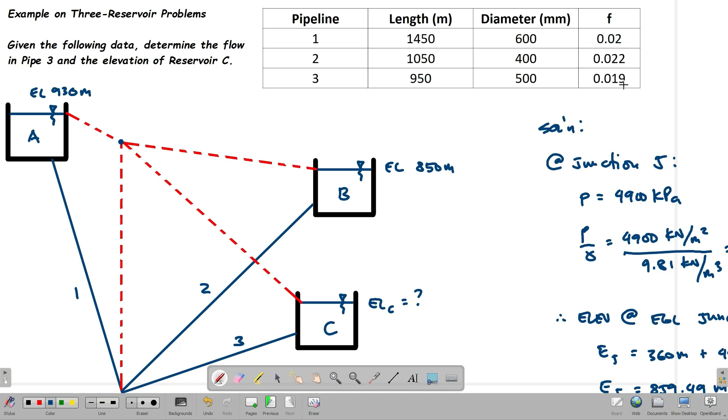So pag F yung binigay na factor or coefficient, ang gagamitin natin dyan automatic is si Darcy-Weisbach na equation. Okay, so ito yung figure natin. Meron tayong tatlong reservoir, tapos given yung elevation ng A tsaka B, which is 930 meters and 850 meters. Tapos meron ding junction dito, ang elevation niya given is 360 meters. Tapos merong pressure gauge at this particular junction J, ang pressure reading natin is 4,900 kilopascals.

And then dinrawing na din natin dito yung energy grade line, yung EGL, on the assumption that the flow from 930 meters, magpo-flow siya dito sa 850, tapos yun, assuming lang na dito din, magpo-flow din. Pero double check natin yan mamaya, kung totoo ba talaga na yung distribution natin is galing sa A, papunta dun sa B, tsaka sa C.

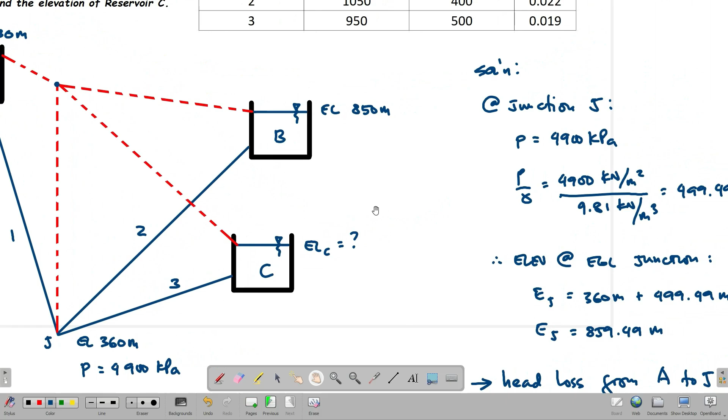Double check natin, okay? So unang makuha natin dito is height ng water dito sa junction natin, if lalagyan natin ng piezometer dyan, aangat yung tubig dyan. Tapos yung height kung saan aangat yung tubig, yan yung equivalent dito sa pressure head natin. So similarly, para lahat ng units natin is naka-linear meter, kailangan din natin i-convert yung Pascal, o yung kilopascal, i-convert natin into linear na unit or meter, kailangan na siyang gawing pressure head. So yung pag-convert ng Pascal or pressure to pressure head, divide mo lang siya sa unit weight.

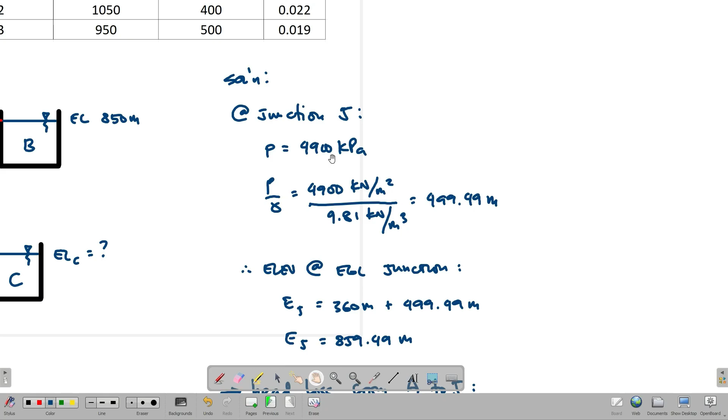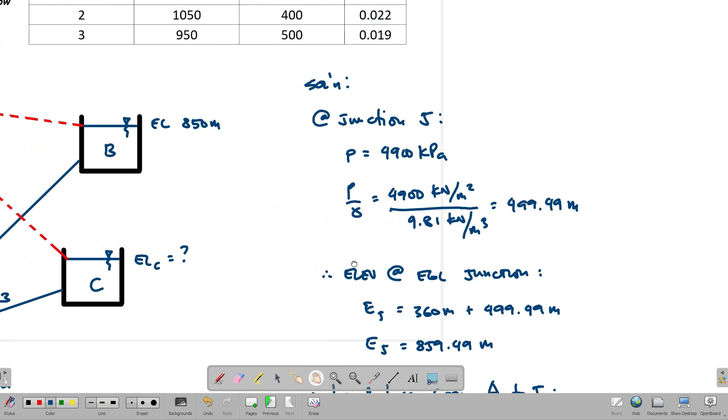So magiging ito na yung value niya, 499.49 meters, yun yung equivalent na pressure head sa pressure na 4900 kilopascal. I-confirm lang natin sa calculator natin, that's 4,900 divided by 9.81, that's 499.49 meters. So pag lalagyan natin ng piezometer yung part na to, mag-insert tayo ng piezometer dyan.

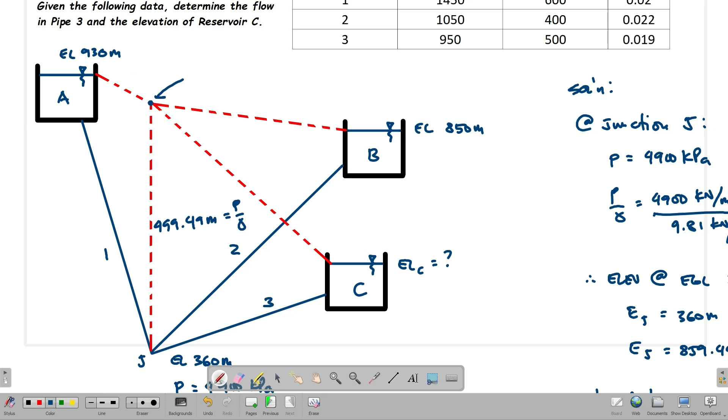Yung height kung saan aangat yung water, water level. So yung water level is just equivalent to plus 499, yung height na yan is 499.49 meters. So ito yung pressure head, okay, pressure over unit weight. So ayusin lang natin yung P, yan, pressure over unit weight. So therefore yung height dito is equivalent lang dun sa additional na 499.49 dun sa 360 na elevation niya.

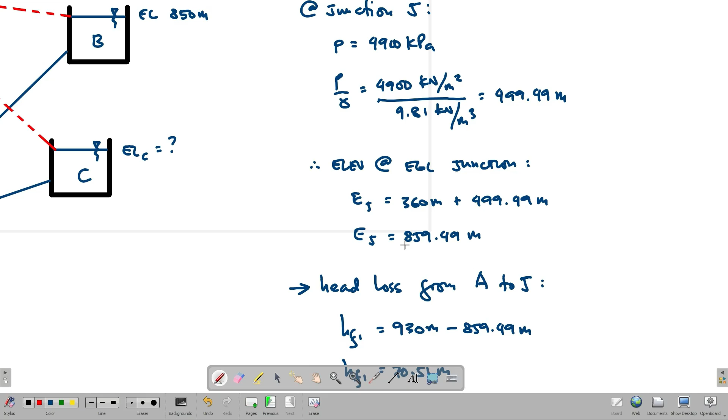So sinulat na din natin dito, that's 360 plus 499.49 equals 859.49. I-confirm lang natin sa calculator ulit, 360 plus 499.49, that's 859.49 meters. So confirm naman, gawin natin dito, this is confirm, this is confirm. Tapos dito, ito na yan, yung elevation na yan, that's 859.49 meters, that's the energy na ngayon dito sa point na to, sa junction, parallel dun sa junction point natin.

So again, yung blue na lines, ito yung actual talaga na pipelines, tapos yung broken red na line, that's the line representing the energy grade line, okay? So dito meron kang energy which is just equivalent to 930, kasi maging 0 yung pressure mo dito, 0 din velocity. Ito naman equivalent lang sa 850, so ang ibig sabihin dito, ang energy dito is just equivalent to pressure over unit weight plus yung equation pa rin natin ng energy, plus Z. So 0 yung pressure dito kasi open sa atmosphere, 0 din yung V kasi negligible yung change natin ng water level, so Z na lang yung matitirang component ng elevation. Therefore, yung energy natin at this particular level is equivalent na sa 850 meters.

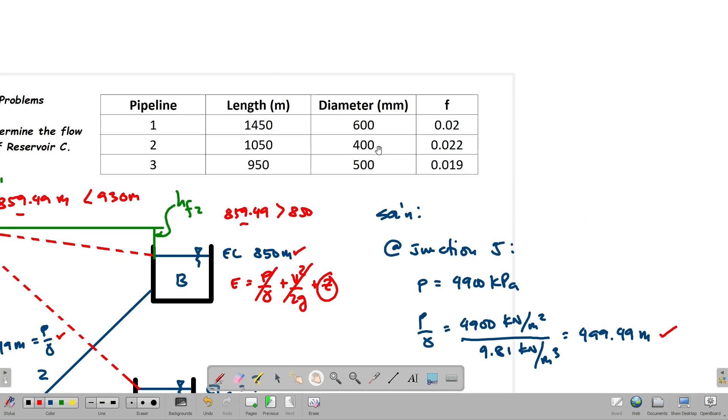Tapos, substitute natin yung mga details ng pipe 2. So 1050, 400, 0.022 yung F, no? So we have 1050, 1050, 400, tapos 0.022.

Tapos makukuha na natin dito si Q2. So si Q2, that's 9.49 times 0.4 raised to the power 5. Divide natin si 0.0826 times 0.022 times 1050. Tapos square root ng answer. Yan, 0.2256, or ginawa na natin dalawang decimal lang, no?

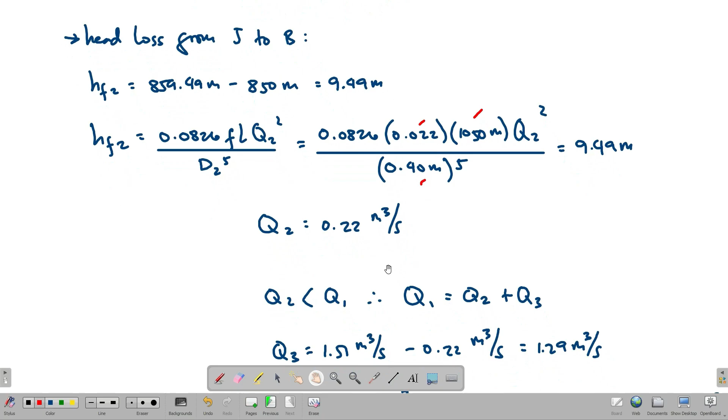0.22. Ngayon, since mapansin natin, less than, no? Q2 is less than Q1. Tapos tatlong pipes lang naman to, no? So therefore, talagang madidivide si Q1 into Q2 and Q3. Kasi nga less than naman, no? Less than si Q2 compared sa Q1.

Kapag kunwari mas malaki si Q2 compared sa Q1, therefore may iba yung equation niya, no? So kung mas malaki si Q2, therefore mag-a-add up si Q1 tsaka si Q3 papunta sa Q2 kung mas malaki, no? Pero since mas maliit siya, no? So less than. So therefore ito yung mangyayari, no? Q1 is equivalent to Q2 plus Q3 kasi nga less than, no? Ibig sabihin may component si Q2 from Q1, which is yung other component is si Q3.

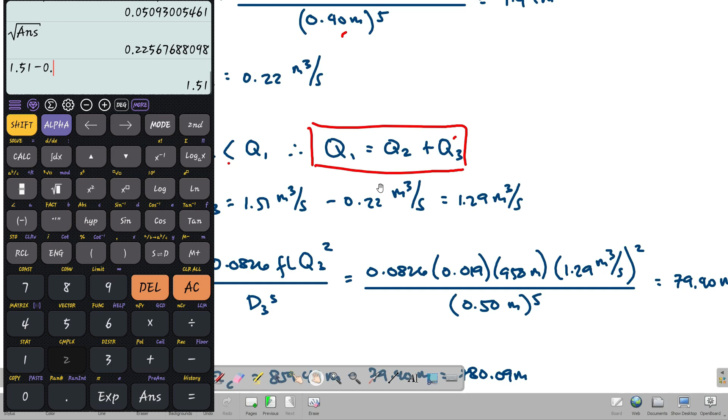Okay? So i-delete na natin to, baka mag-ano pa siya ng confusion, no? Okay? So pwede nating i-solve ngayon si Q3 based sa Q1 and Q2 na values. So Q3 is just 1.51 minus 0.22. So that's 1.51 minus 0.22. That's 1.29. So meron na tayong value ngayon ng Q3.

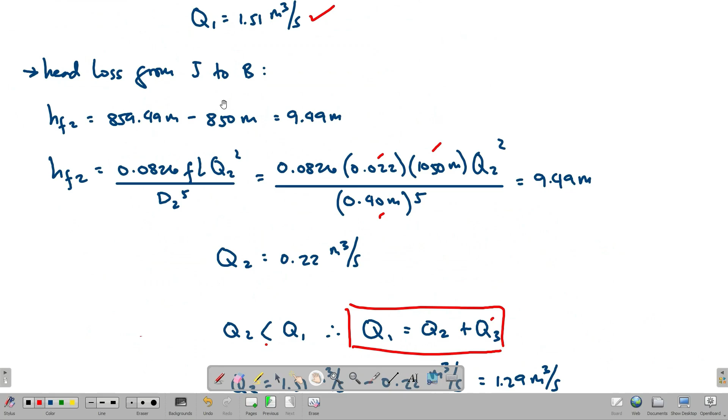Baliktad naman yung gagawin natin ngayon sa pipe 3, no? So meron tayong value ng Q, tapos merong given na values dito for pipe 3. So 0.019, 500, tsaka 950. So substitute lang natin dito sa equation natin, no? So we have 0.019, 950 yung length, tapos 500 or 0.5 yung diameter. Makukuha na natin si head loss as 79.40.

Pero i-confirm pa rin natin, no? 0.0826 times 0.019 times 950 times 1.29 squared divided by 0.5 raised to the power of 5. That's 79.39, or ginawa na natin 79.4.

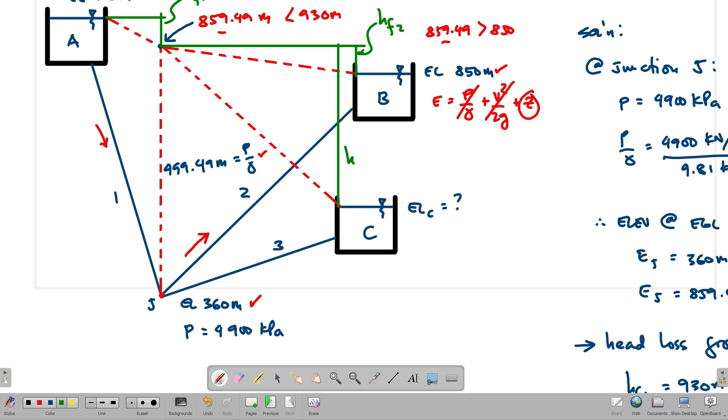Tapos yun yung energy head loss ngayon, no? So ito yung nawalang energy from the junction to your pipe or your reservoir, no? So ito yung nawalang energy. So kung lalagyan natin ng line, ito na yung line, no? So ito yung nawalang energy galing dito papunta. Control Z lang natin para straight yung line natin, no? So ito yung nawalang energy papunta dito. Okay? So this is your head loss sa pipe 3, which is just equivalent sa ito, meron tayong nakuha ang value dito which is 79.40.

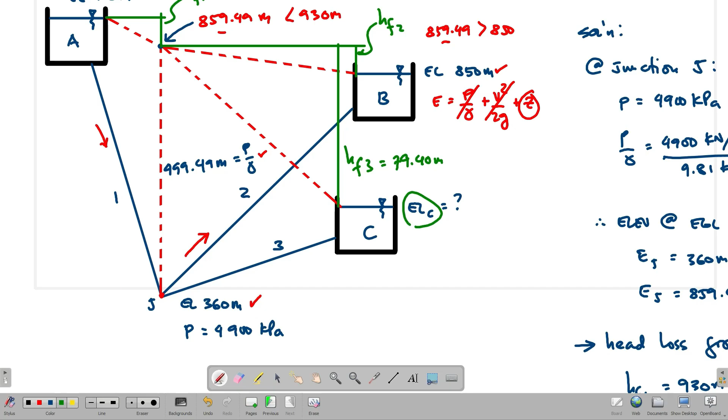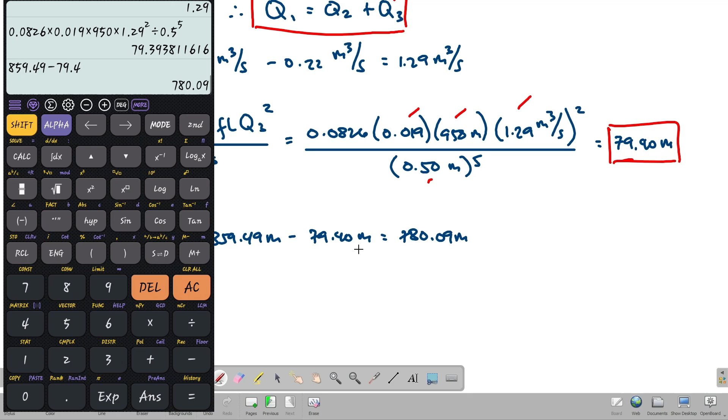So ngayon yung elevation C is just the difference, no, ng energy dito, which is 859 minus 79.4. So ito na yun, no? Ginawa na rin natin dito. So the energy is therefore 859.49 minus 79.4. Confirm natin sa calculator natin, no? 859.49 minus 79.4, that's 780.09 meters. So ito na ngayon yung elevation ng reservoir C, yung water level ng reservoir C.

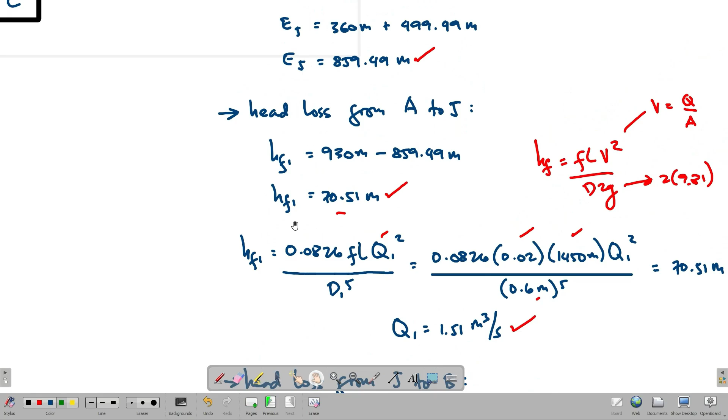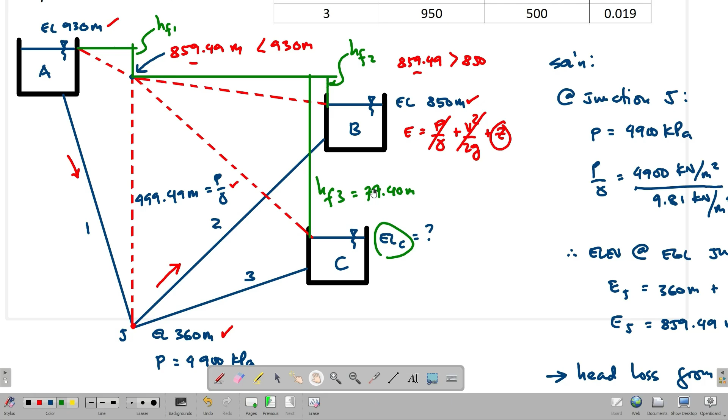So medyo madali lang talaga yung concept, no? Medyo mahaba lang yung gagawin mo kasi syempre tatlong pipes, tatlong reservoir, tapos yun. Yung i-check lang naman natin dito is yung difference sa mga energy levels nila. So hindi talaga yung elevation ng pipelines natin or junction, but the energy, no? Kasi yung flow natin is based dun sa energy. So conservation of energy. So higher energy papunta siya sa lower energy kasi may na-transform lang na part ng energy into head loss. Kaya naging lower energy yung next na point.